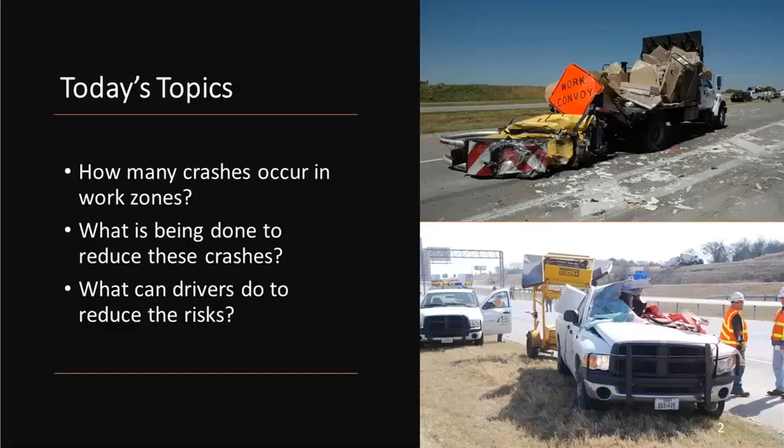I do want to go through a number of strategies that agencies, contractors, and highway workers themselves are doing. We don't, as drivers, a lot of times realize what all does go into trying to make a work zone safe and minimize the impacts to the traveling public, as well as maintaining safety for our workers. And then we'll touch at the end, just to reiterate what I think is pretty common sense, but I do want to end with reminding everybody what drivers themselves can do to reduce the risks of work zone crashes.

So with that, just a few numbers. This is from 2017. It takes a little bit of time to update the data, but 2018 wasn't a whole lot different, and I suspect 2019 will be similar as well, and they're a little disappointing, if you will, that in a typical year nationally, over 750 people lose their lives in work zone crashes.

On top of that, we see another 37,000 individuals that are injured in these work zone crashes, and they comprise almost 100,000 crashes a year. So when you divide that across the United States, depending on which state you're in, you might see 2 to 3. Here in Texas, we see upwards of 3,000 work zone crashes a year, and the fatalities, that's 2 a day that we lose across the country to someone crashing in work zones. So certainly something to be aware of, and that we can't take for granted.

A little bit about where these crashes occur. They don't occur exactly in the same locations and in the same proportions that non-work zone crashes do, and you can see that right here. Compared to the crashes that occur in non-work zone locations are work zone crashes, and this reflects fatal work zone crashes, but trends are pretty similar for non-fatal work zone crashes as well.

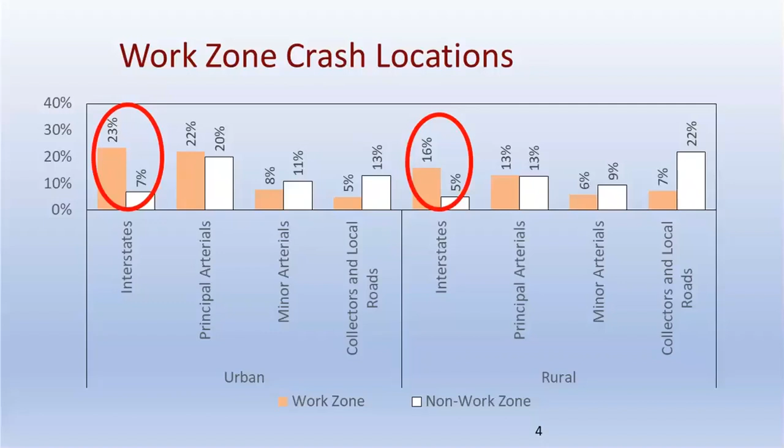Many more of the work zone crashes occur on our interstate, high volume, high speed facilities. That's a reflection of the fact that those are higher speed, higher volume facilities, and also reflects the fact that agencies have to spend more time keeping these roadways that are used more often maintained, rehabilitated, reconstructed, that kind of thing. So that's one of the things to keep in mind, that's where you see the bulk of particularly fatal work zone crashes occurring across the country, both urban and rural areas.

Because we're on those types of facilities, and that's also where we have a lot of our commercial vehicle traffic, we see a significant overrepresentation of commercial motor vehicles involved in, in this case, fatal work zone crashes on those facilities. As you can tell, on rural interstates, more than 1 out of every 2 fatal crashes that occur in work zones are going to involve a commercial motor vehicle. Most of those are the large semi-tractor trailer vehicles. We believe a lot of those are actually haul vehicles associated with the work zone activity itself. It's a little difficult to make that association with the construction vehicle with the available data, but certainly significant involvement of these commercial motor vehicles.

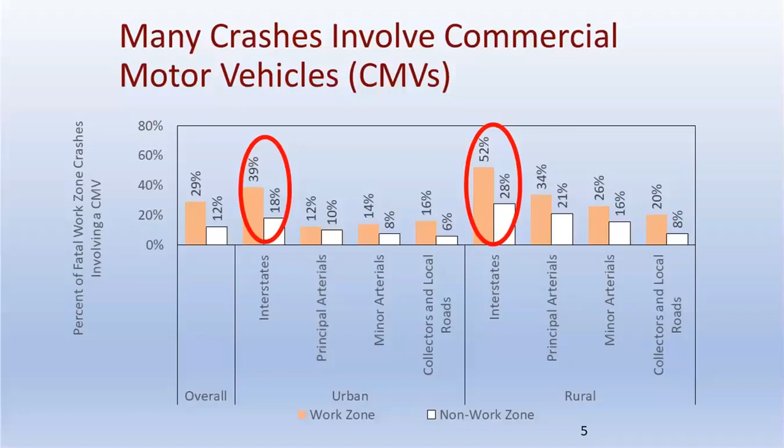I will say, we hear about the ones that make the news, the large vehicle that runs into the back of a queue, and those are certainly tragic. They usually involve a large loss of life, but the data doesn't suggest that it's strictly the drivers of those vehicles that are causing or contributing to these crashes. There's just as many fatalities that occur because of a passenger vehicle running into the back of these commercial motor vehicles, and because of the size mismatch of those 2 vehicle types, the crashes are very severe either way. So don't take this as a complaint against the commercial motor vehicle driving community, just a recognition of the risks involved with work zones, particularly on these higher volume, high speed facilities.

A little bit about highway worker risks. In addition to the fatalities that predominantly occur to drivers and passengers of the motor vehicles, we also lose a significant number of highway workers each year. In a recent year of data, 124 across the country were killed, and you could extrapolate that to thousands that were injured as well, although that data is a little more difficult to come by.

When you look at what types of events lead to those fatalities, a little more than a fourth are the work-related kinds of hazards where they fall from heights or equipment or material falls on those workers, electrocutions, suffocations due to trench collapses, which is a very big issue in our highway work, and improper trenching being used in those situations leads to those types of fatalities.

Another 28% are actual traffic-related fatalities: workers as drivers or passengers traveling to and from the work site to deliver materials or whatever, who are involved in a traffic crash and are killed. But the plurality of the fatalities that occur are workers on foot who are hit by a vehicle of some type, run over or even backed over.

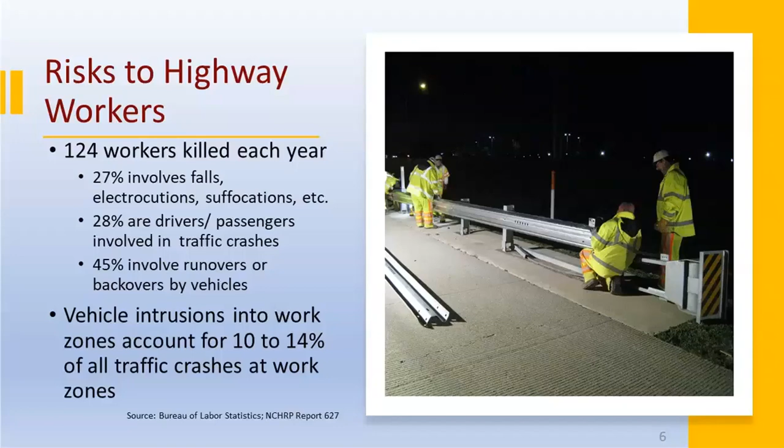I've talked about overall numbers. Maybe one of the other ways to think about this is in terms of increase in risks. How much does a work zone increase my risk of being in a traffic crash as I approach and pass through it? And it really depends on the roadway type, as well as in this graph the type of work itself that's being done. As you can tell, if we're in a work zone and there's no workers there, it's what we would call inactive in the industry term.

We see some increase, 24% greater risk relative to driving that section of roadway without a work zone, and that's because we typically have to narrow lanes. We may have to close the shoulder. We have to put a barrier, or we put up devices next to the road, and all that little lack of available recovery space and shifting lanes contributes to that 24% increase.

When we get people starting to be there at the job or work site and doing things, we see again a slightly greater increase in risk, 31%. That additional amount is due to workers doing things that are catching people's attention. We call that rubbernecking in some cases, and people are looking at that instead of what they're supposed to be doing, and so that explains that slight uptick in risk.

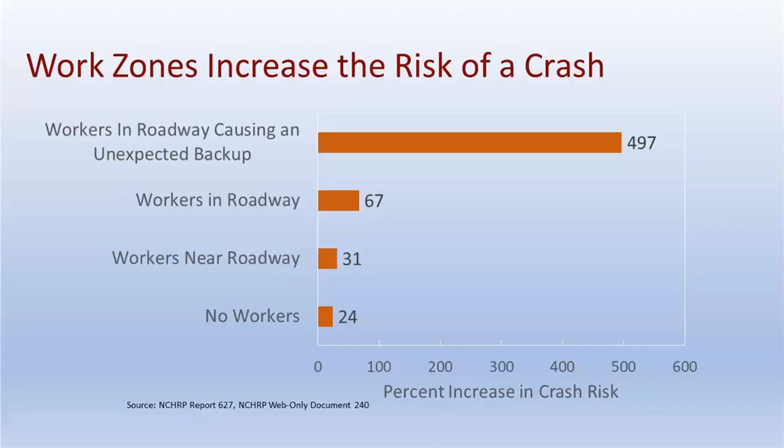And it's because we're not used to, particularly on our interstate roadways where we're used to traveling at speed, coming upon a situation where traffic stopped. We're not paying attention. That happens so quickly and leads to these crashes. And most of them are rear ends at the back end of the traffic queue. So what do agencies and contractors do to try to mitigate these risks?

Really four categories of things that we talk about here. Trying to reduce the duration of the work zones and the number of them by coordinating things, trying to figure out ways to minimize the impacts to traffic when we do the work, using what we refer to as positive protection when we can, and then the fourth category is if we can't do those things, or even if we can, also providing notifications and warnings in real time so that they're credible and drivers know to react to them because they reflect what's currently going on.

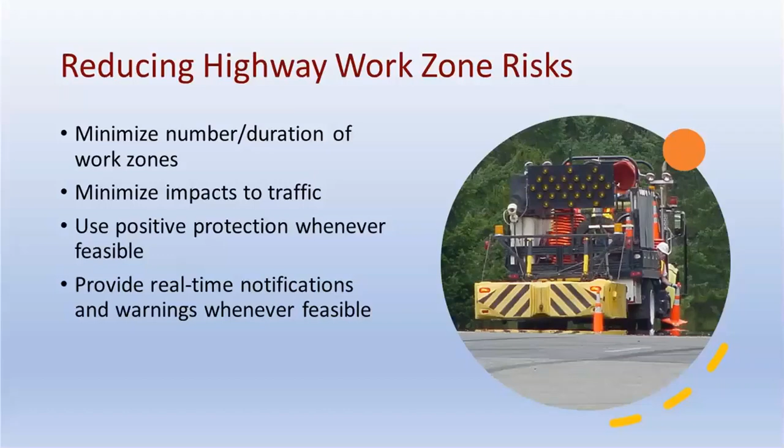To reduce those risks, using longer-lasting materials, making longer-lasting repairs, and coordinating work efforts amongst different crews, even on the same facility or on multiple facilities in a region, are ways that agencies and contractors try to limit the number of work zones out there, because as I showed in that previous slide, any work zone increases risk. So if we can combine things together so that we don't have to do as many work zones, that obviously improves work zone safety.

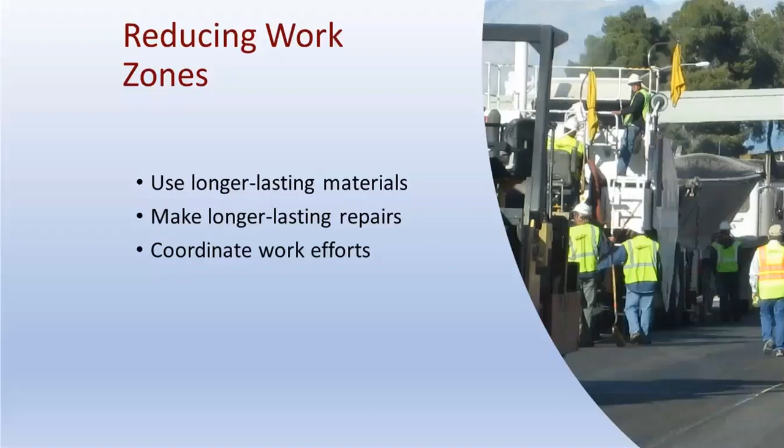As far as minimizing impacts, I think everybody's familiar. We do a lot of work at night and on weekends.

It's a little more challenging for the work crews. They can't see as well. We have more impaired drivers, but still the trade-off to having all the work done during the day and having all those backups and that increased risk to all motorists is to do this at night and try to keep traffic from backing up as much as possible. The other thing that we try to do is provide a significant amount of advance notification so people don't use that road on the day or night when work is occurring, use other routes, that kind of a thing.

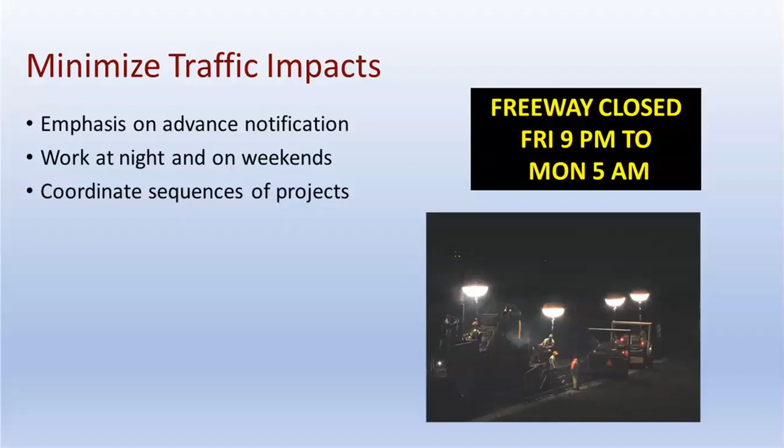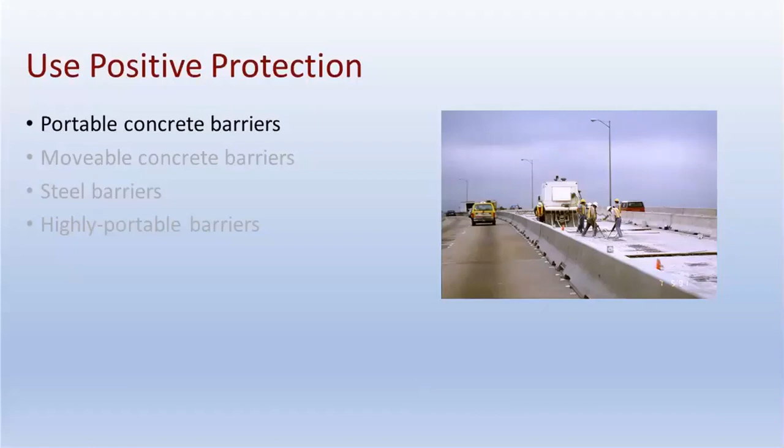As far as positive protection, it used to be we only used the concrete barrier like you see here in the picture, and that was our only option available. And so depending on the type of work, if it was long enough and big enough of a project, we'd use it, otherwise we didn't. Fortunately, we are seeing technology coming through, and you'll see a number of other types of devices too that make it more useful for workers themselves.

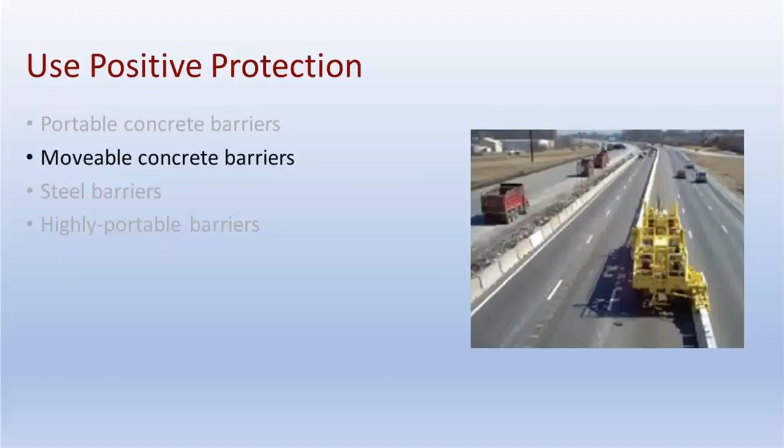Movable barriers. These devices are interconnected. You use a machine like this, and we can move the lane, the barrier itself, very quickly every day, every night, to create a space for work crews to work, and then pull it back over when they're not working, so that vehicles can use the maximum number of lanes, and it minimizes congestion and that kind of thing.

We have a number of manufacturers that have started producing steel barriers. These are easier to move than concrete. In this particular design, there are wheels on the bottom that you can activate and move the barrier off or around as you need, and then roll the wheels back up, and it sits on the ground. Again, more flexibility, more applications to different work sites to protect the crews as well as the motoring public.

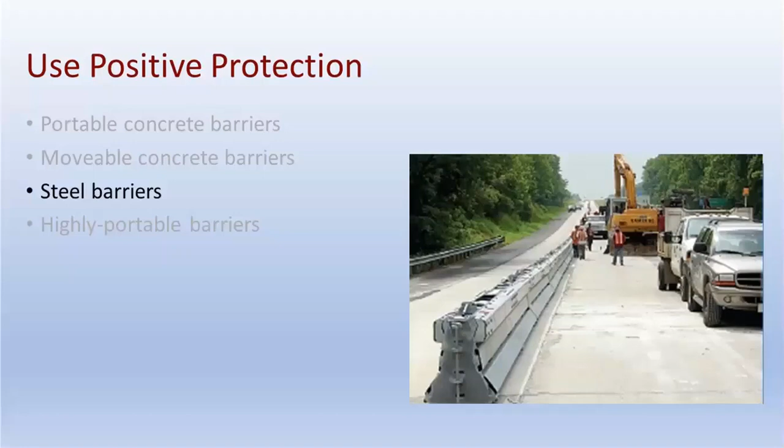And then the fourth category are what we refer to as highly portable barriers, where they're actually on a semi-tractor trailer that is towed into position here. They create a very solid workspace for crews that have to work right next to moving traffic. And so for very short duration activities where you can roll in, work for a few minutes or hours, and roll away again, it provides an opportunity to protect the motoring public as well as workers in a way that we used to not be able to do when all we had were portable concrete barriers to work with. So another way that agencies and contractors are protecting our work zones.

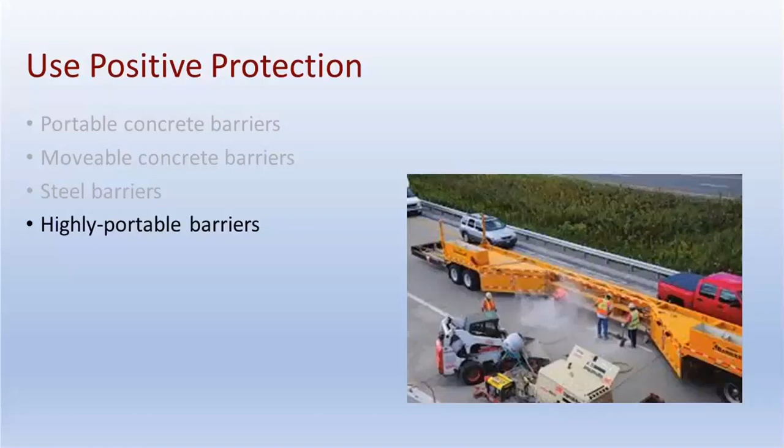As far as the fourth category, the real-time warnings and notifications, we start with what I would call lower tech, but certainly a very good recent innovation, and those are portable rumble strips. We used to have to lay things down and glue them to the pavement, and so it didn't really work well for really short time frame kinds of work zones. We now have devices that are heavy enough and easy enough to move out, lay down at the beginning of a work shift, and then pick up at the end of the work shift.

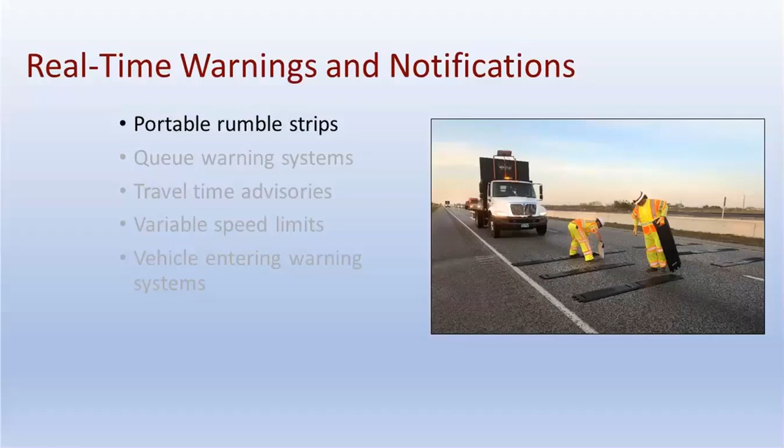Because they're laid down and are obviously temporary, we've seen evidence that the motoring public recognizes them as such, and it activates: hey, there must be something ahead, because they wouldn't just put this out and leave it. And we see significant reductions in crashes that occur when there's a queue down the road, because the visual, if they've seen it, elevates their attention. If they're not paying attention, the tactile vibrations of running over this gets their attention. They start looking around for why, and that improved attention makes a big difference in reducing crash risks at work zones.

The higher technology level types of things we call smart work zones, and there are different applications here. One application is a queue warning system where we put out sensors around the work zone that tell us if traffic has slowed down and started to back up, and then that automatically triggers a message upstream to tell people that there is slow or stopped traffic ahead, and how far away it is, to indicate that this is real time. This is not just a general warning.

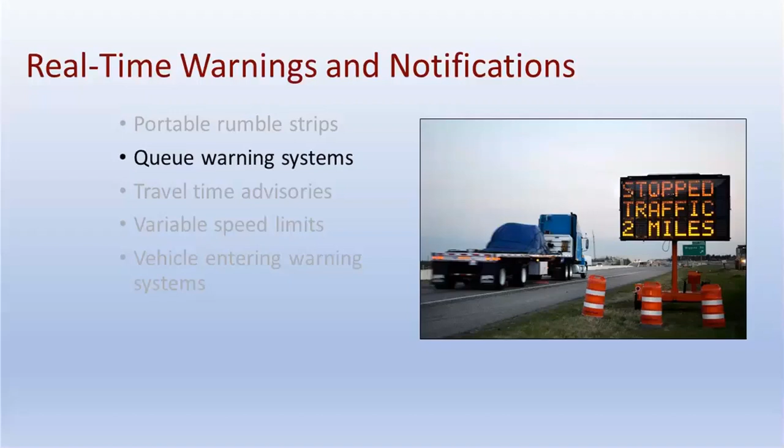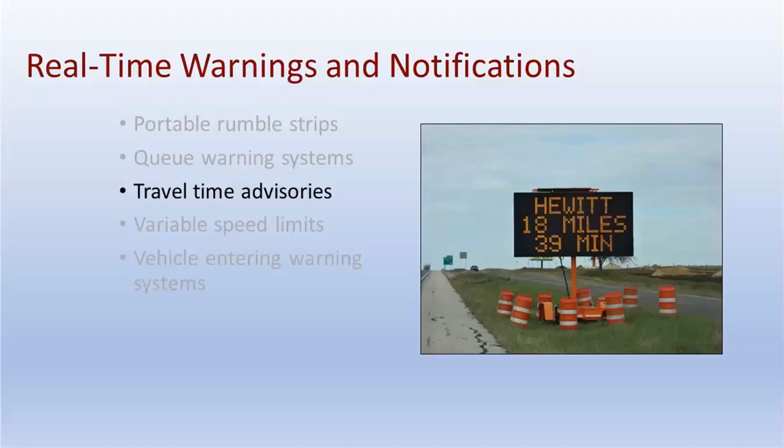And again, we see very, very positive crash reduction benefits from this type of technology. In other instances, even farther away from the work zone, same kinds of different types of sensors, but same kind of a smart work zone system to manage the data associated with how long it's taking to make trips. These travel time advisories give drivers an indication that, hey, there must be something ahead, because the amount of time doesn't seem consistent with how far away it is. It also encourages diversions, and if we reduce the amount of traffic on the roadway approaching the work zone, risks of a crash, as well as the duration of the congestion that might be there, reduces, further improves safety.

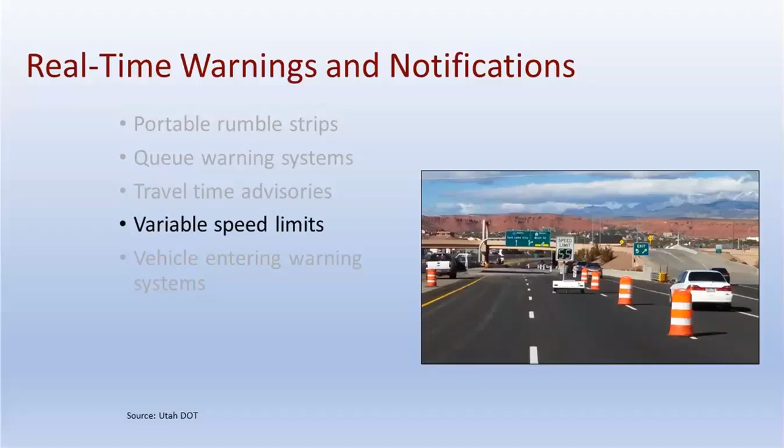A few states have been granted the ability to actually use variable speed limits. Texas is not one, but here, Utah, they have experimented with variable speed limits in the work zones and have been very pleased with the result. It all goes back to credibility of what the agency and the contractor are providing to motorists, and motorists recognize that this must be real time. They're slowing me down for a reason. You see compliance automatically improve with the speed limit as opposed to a static one that's reduced all the time. And again, they're very happy with that. Unfortunately, I don't have any crash data to share with you yet because it's a fairly recent innovation, but I suspect they will experience a good drop in work zone crashes because of that.

And then perhaps one of the latest innovations that we are seeing interest in across the country are these vehicle entering warning systems, where we've got the workspace in the median or adjacent to the right shoulder, but very limited place for construction vehicles to get in and out. They come in and out at much slower speeds than normal speed of traffic. You create that rear end crash potential that leads to fatalities and injuries. These systems are, again, with sensors. They detect when a vehicle's getting ready to leave the workspace and enter the traffic lane, and notify workers or drivers approaching that there is going to be a slow speed vehicle entering. People merge out of that lane into the open lane, which reduces the risks to the motoring public in general.

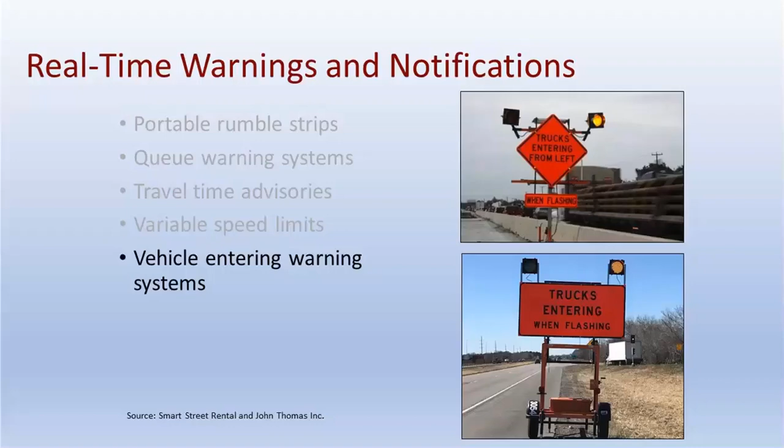So all these systems are things that the agencies and the contractors are doing to try to reduce risks. We do expect to see quite a bit of technology innovations in the near future as both connected vehicles and automated vehicles are being worked on by manufacturers and vendors. Someday soon, we think you'll be able to receive real-time information in your own vehicle about a work zone. If you've got an automated vehicle, it'll be able to receive information about a work zone downstream wirelessly and adjust accordingly. And that'll, again, we think make a further improvement in work zone safety.

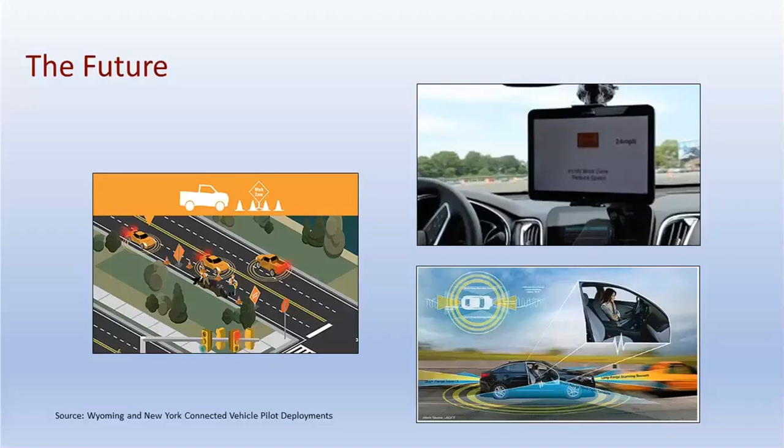Finally, I'm going to leave you with this. Despite all the things that agencies and contractors are doing to improve work zone safety, as you saw at the beginning of the presentation, we do see a lot of work zone crashes and a lot of fatalities, and it's up to the motoring public drivers to be responsible themselves to bring those numbers down. Same things that you've been taught since you first got your driver's license.

Maintaining attention. We think distracted driving is a big problem in work zones because conditions change, and while one minute it looks like it's fine and you're floating along at 70, 60 miles an hour, it doesn't take much to come over a hill and encounter stopped traffic, and the results are never good. So maintaining attention, maintaining that safe gap, no tailgating, because you need that time to adjust to changing conditions and get safely slowed and stopped if necessary. Actually slowing down and paying attention to the speed limit through the work zone. Obviously, a very common sense way to reduce your crash risk in a work zone.

The last one is something I see a few entities themselves, some fleet companies, trucking companies, even agencies with their own staff doing: if you end up encountering a work zone that's causing a backup, and particularly if you're at the back end of that, activating your hazard lights so that motion of the flashing lights catches the attention of somebody who's distracted, reducing the risk of that person not responding in time and running into the back of you.